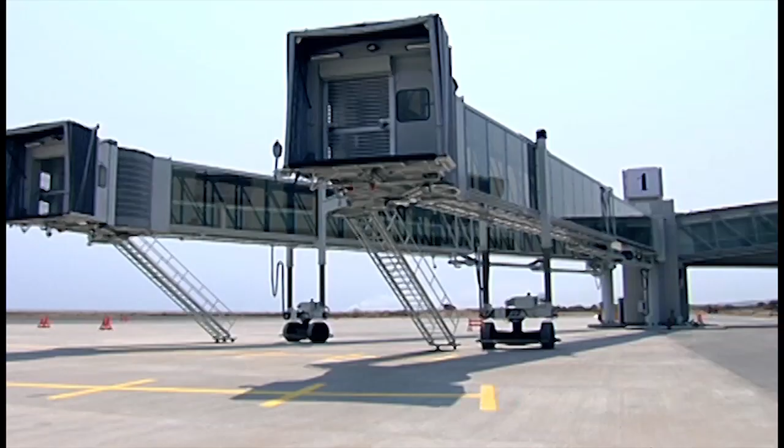Angola is consolidating its achievements since it has reached peace about 16 years ago and its independence about 40 years. One of them has to do with the strengthening of institutions through its modernization and elevation on the quality of public services.

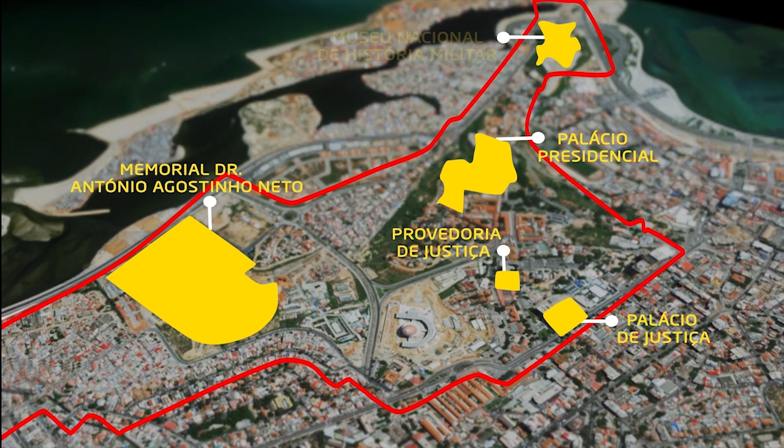One of the beneficiary sectors of this rehabilitation process is the Political Administration Center. Among its most iconic buildings, we find the Presidential Palace, the Justice Palace, and the Dr. Antonio Agostinho Neto Memorial, the Ombudsman Building, and the National History Military Museum, the Science and Technology Museum, and various protocol facilities, and now the House of Laws, the National Assembly.

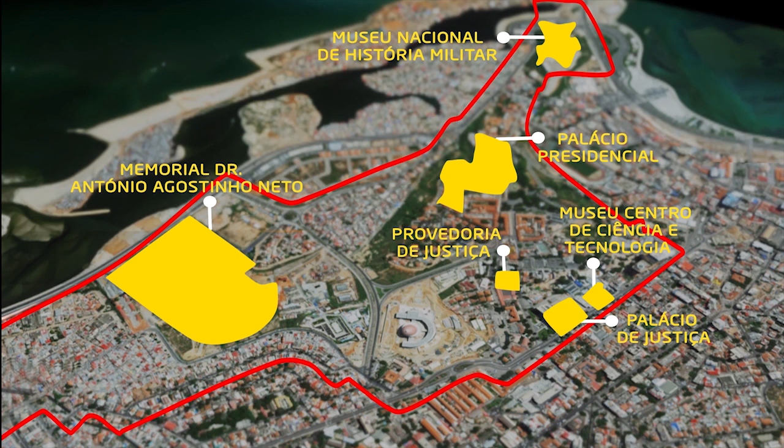It is this body that also represents the willingness of the Angolan people, and this willingness is translated into laws. That's where all laws are discussed and adopted, that all citizens and institutions are supposed to fulfill.

Since the country has reached its peace, the then Restoration National Theatre Center was inaugurated in 1952, was later transformed into the Congress Palace, which hosted the People's Congress and later the National Assembly. This old National Theatre hosted the House of Laws for 40 years.

This building also had its own history. It is the place where the country had adopted its constitutional laws. It is where the country had adopted the one-party system into the multi-party system. It was the building where many special laws were debated and adopted. It is in this building where the Luena Memorandum of Understanding was signed, which brought a definite peace to the country.

This is the building where the Constitution of the Republic of Angola was approved.

Nowadays, its conditions are not the most adequate ones. Firstly, because with peace, the country is experiencing a populational increase. For instance, Angola had until 1990 10,200,000 inhabitants and is now registering at 24.4 million inhabitants.

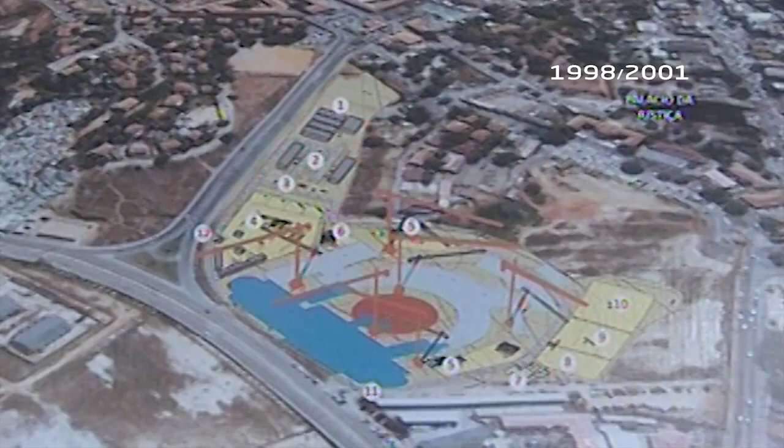In 1998, the Special Construction Works Department receives instructions for the building of the new National Assembly through a presidential initiative. The same year, allocation of land was made possible, as well as the architectural configuration of the building. Studies and projections resulted in this majestic image.

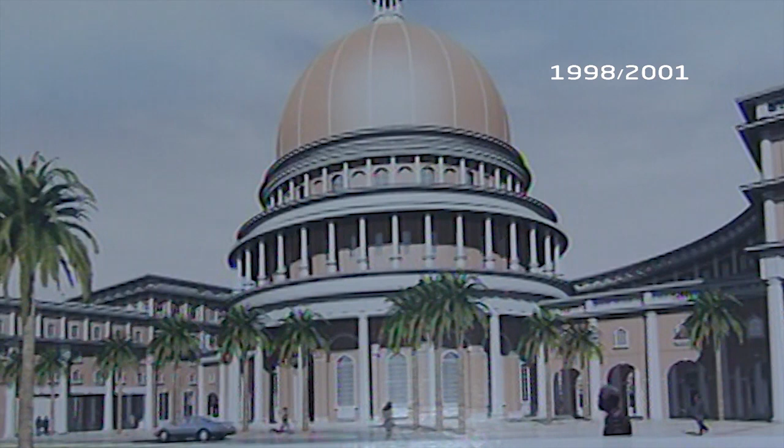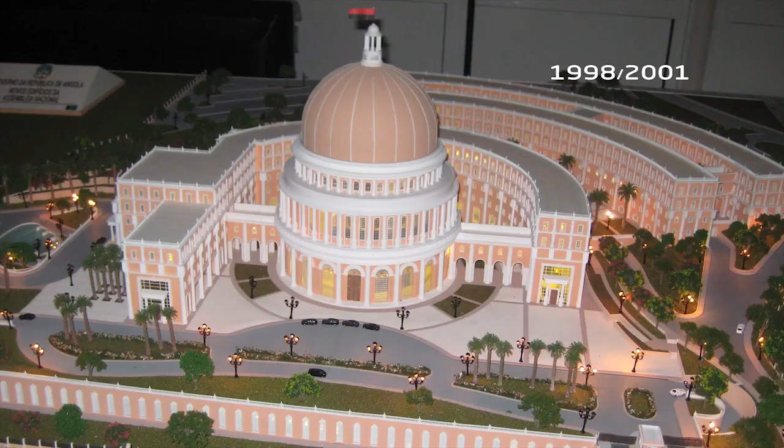In accordance with the instructions given, the designers thought of and elaborated the impressive building with neoclassical architectural features, with a six-floor building, among which a basement and a huge plenary hall as the project main center, emphasized by a looming dome, surrounded by supporting facilities scattered through the different project phases, which also has a noble hall, departments for the different parliamentary groups, standing committees, and its basic functioning structure, as well as the number of employees to be absorbed.

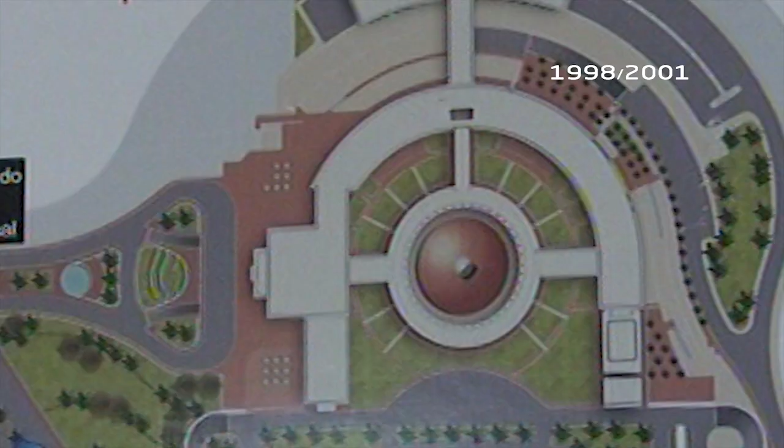All in all, the building has 72,000 square meters of constructed area, equivalent to 10 soccer pitches, and it's divided into 4 blocks, supposed to be built in 48 months. There is a clear goal, providing dignifying working conditions for the members of Parliament. 15 October 2009.

The then President José Eduardo dos Santos launches the first building stone. Heavy machinery start excavations and start transforming the space with tons of concrete and steel. Piles are built for the building foundations. The superstructure began with underground parking.

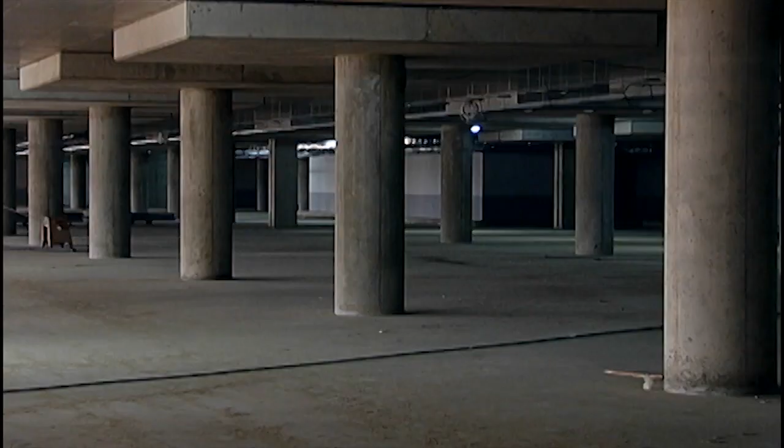The firm foundations of the future National Assembly were at this time laid.

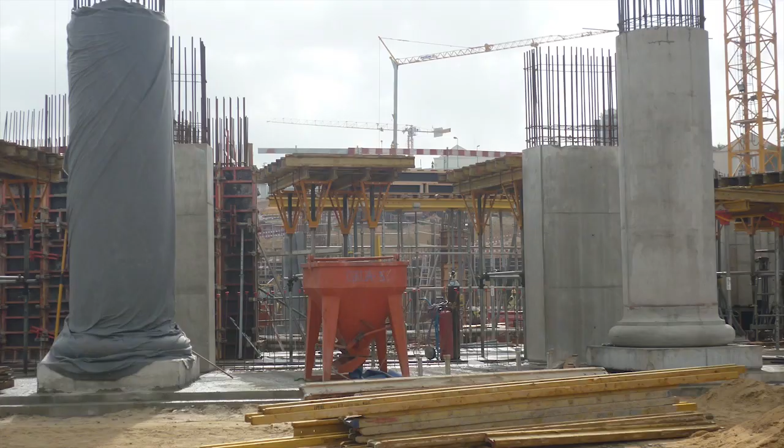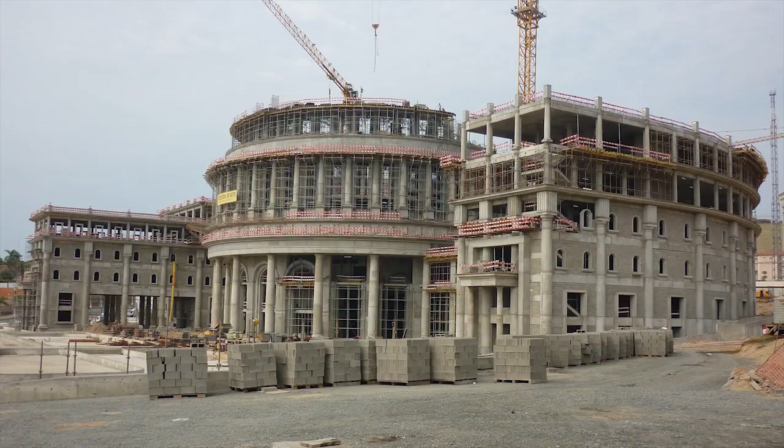The building starts getting shaped with the construction of these robust pillars. The masonry work and the impressive concrete bars definitely transform a project from paper to reality, from virtual to real.

About 70,000 cubic meters of concrete were consumed, equivalent to 10,000 concrete trucks, and 11,500 tons of steel, equivalent to 11,000 vehicles.

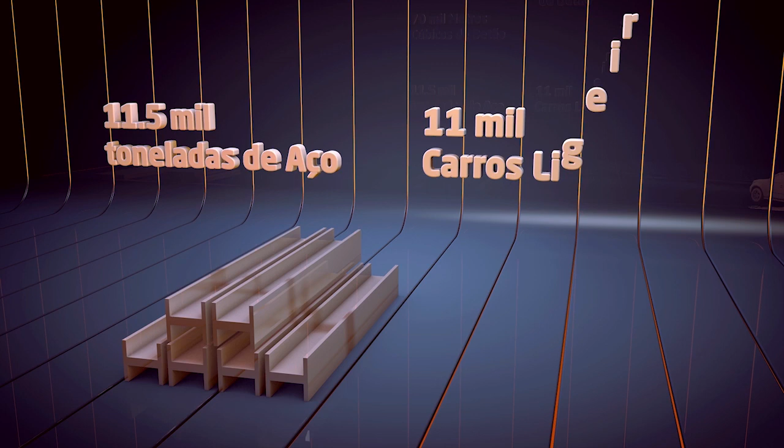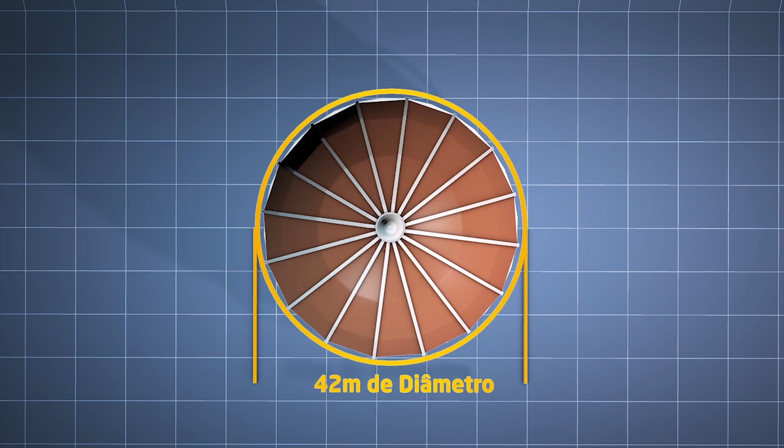One of the crucial works starts with the assembly of the dome, that is 42 meters in diameter and 23 in height, equivalent to an 8-floor building. Precision in its assembly is carefully planned if all is to go well.

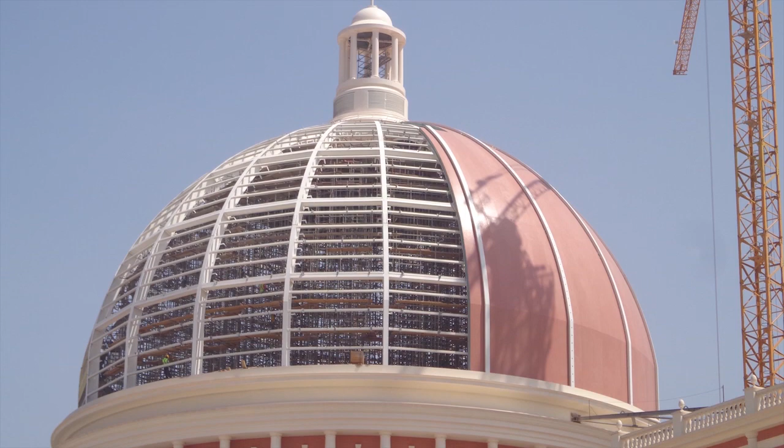With its scientific knowledge and taking advantage of state-of-the-art technology, engineers overcame the challenge of precision. The result was a carbon glass dome, ceramic coating, that has become a landmark of the capital.

The construction process involved the installation of 500 kilometers of cables for telecommunication and 500 kilometers of low-voltage energy, equivalent to a distance from Luanda to Lobito, Benguela province.

The finishing touches entail the assembly of 1,300 doors, 15,000 bulbs of different kinds, 20 elevators, and 10,000 sockets. In the exterior, arrangements were made that match with access with the new Parliament headquarters, green spaces and water surfaces.

The sharp slope of land was also seized, resulting in an attractive overview, but above all, ecologically recommendable, as it has 10,000 square meters of green space, which reinforce the project integrity and help distinguish the various circulation standards.

Dr. Agostinho Neto Street gives access to the new headquarters of the National Assembly by the South Gate, whose destination is the main entrance of the National Assembly, and the parking lot.

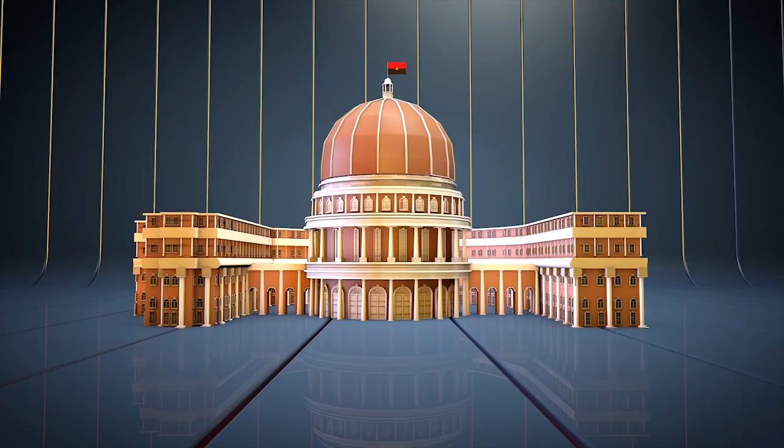What was once a project has definitely become the new headquarters of the National Assembly. Now we present to you the 4 blocks that make up the new House of Laws.

Curved block, south and east part. In the eastern part of the curved block, we find an auditorium which accommodates 250 seats, and the restaurant for supporting staff, accommodating 132 seats.

The mezzanine houses a VIP restaurant with 168 seats. On the third floor, we find another VIP restaurant with 234 seats.

The restaurants of the National Assembly have a fully equipped kitchen with state-of-the-art technology.

Between the first and fourth floor, we find the administrative services of the General Secretariat and the supporting meeting rooms.

In the south part of the curved block, on the ground floor, we find the central CCTV monitoring the 82 robotic cameras, and the room prepared for press conferences.

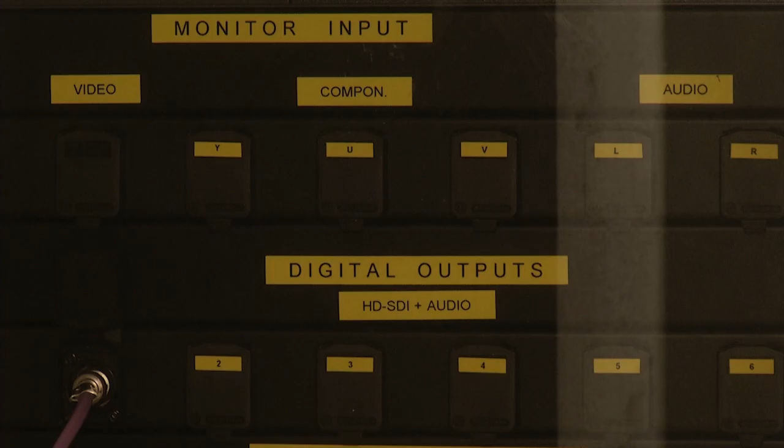It is in this room where we find a press box, a digital output box for radio and TV broadcasts for live feed and press support services.

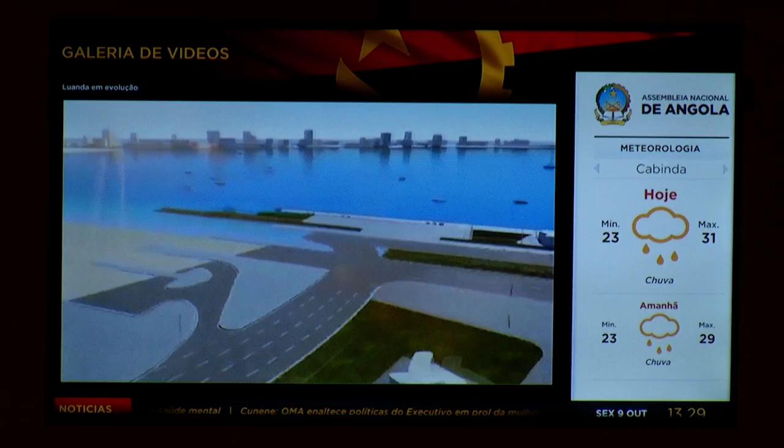There is also a corporate TV system available, IPTV, that allows access to TV computer signal.

On the first floor, we find two conference rooms, one accommodating 77 seats and the other housing 100 seats.

From the first to the fourth floor, we find the parliamentary group's facilities.

Rectangular block, or northern block.

On the northern block, on the mezzanine, we find the office of the chairman of the board of directors of the National Assembly and other protocol areas.

The 10 standing committees and the 2 committees are located on the first floor.

On the third floor of the rectangular block, we find the offices of the 4 deputy speakers and their clerks.

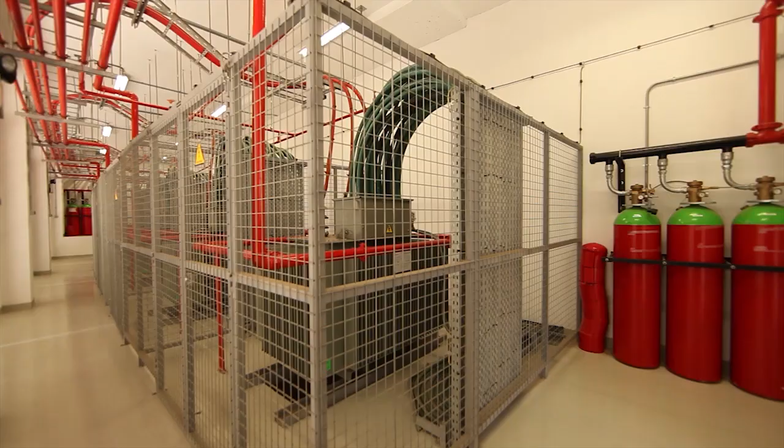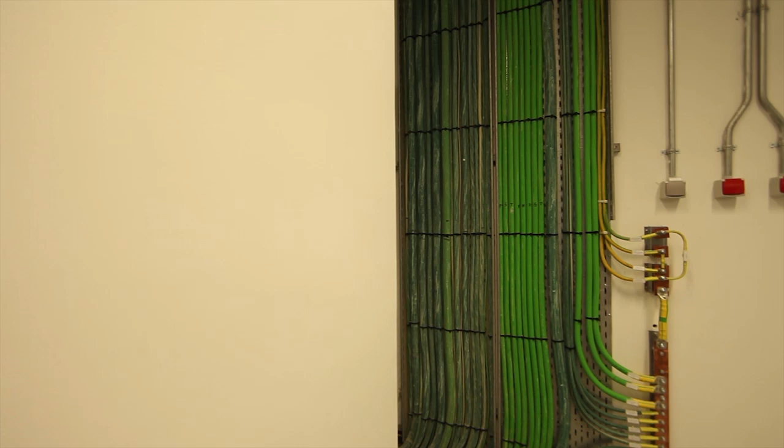Technical area. The technical area of the new National Assembly has 5 1000 kVA transformers each, 5 1250 kVA generators each, with synchronizing electrical panels, uninterrupted power sources (UPS), data communication networks, and 10 GB per second structured cabling, fire detection system.

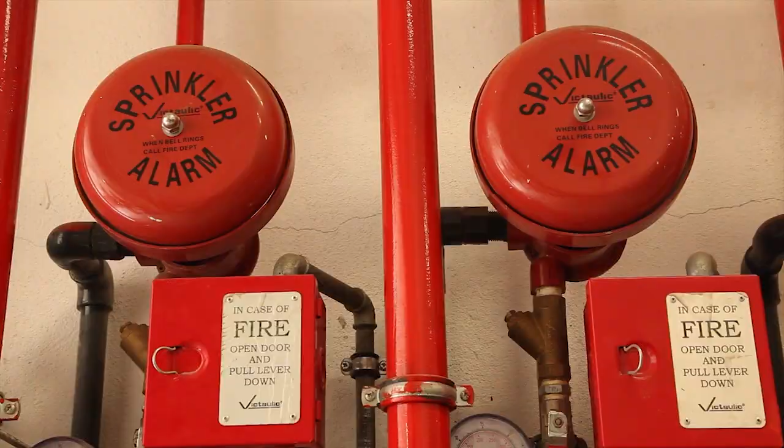Access and security control system, as well as data integrated management system.

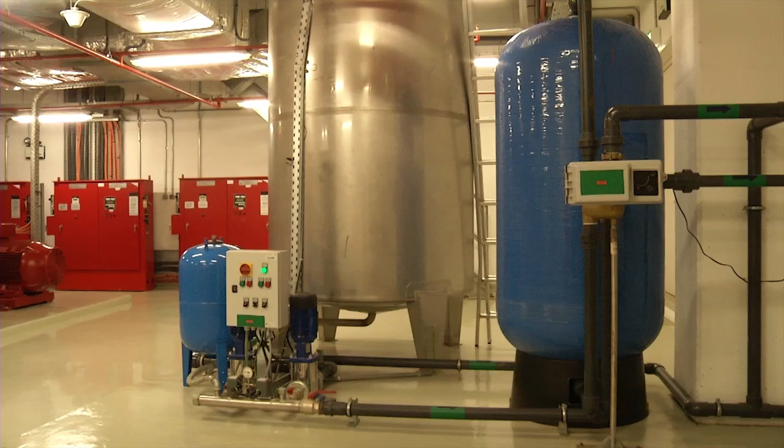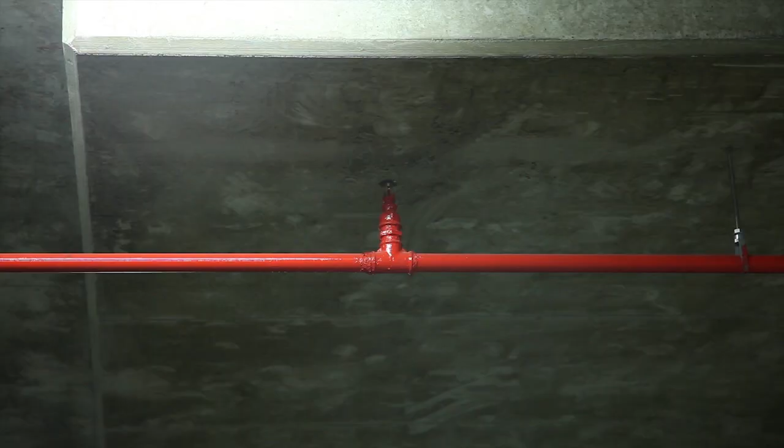Mechanical system. Hydraulic systems are made up of waste water system, rainfall water networks, cold domestic water, hot domestic water, drinking water, fire extinguishing system by water, FM-200 fire extinction system, automatic irrigation system, pumping and chemical treatment system for water surfaces.

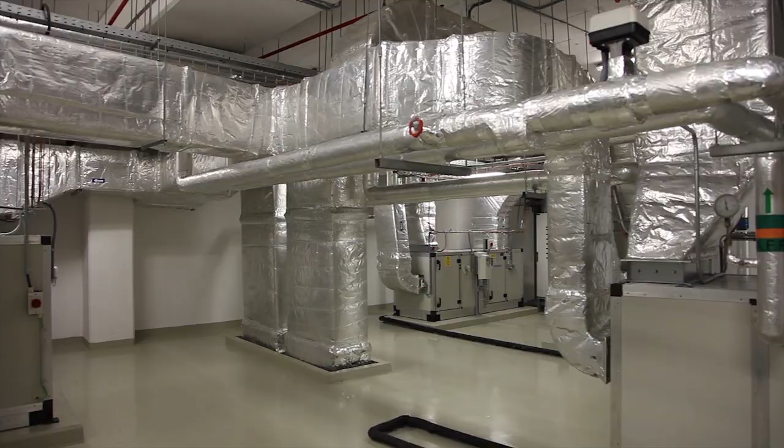Ventilation and air conditioning system. The air conditioning system of the National Assembly is made up of a water refrigerator system and the air treatment system.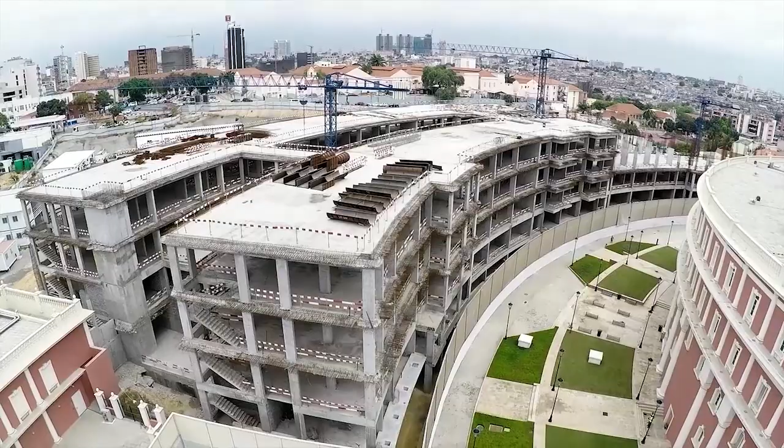The National Assembly needs to be commended, as it for too long waited for dignifying facilities. We need to recognize the efforts of the government of the Republic of Angola and the President of the country for taking the noble decision to build such an enormous building.

And we take the responsibility to take care of it, make the most of it, and take as much benefit as possible of the equipment made available to us.

With peace, the country has just gained a new landmark. This is the new and permanent headquarters of the National Assembly.